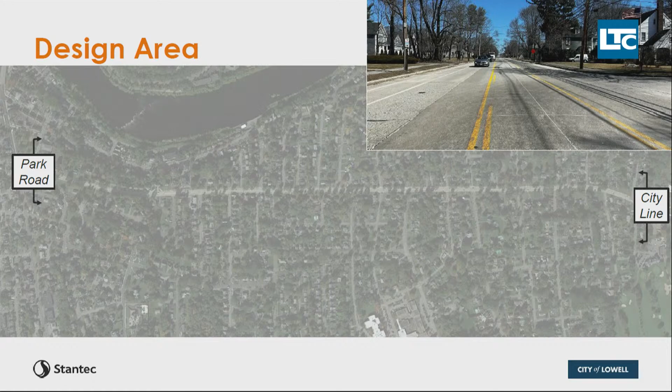We went out there early in the spring and realized that this is a road with a lot of complications, but also a lot of opportunity. As you can see on the screen, Andover Street is used by people to walk through their neighborhood and to ride the bus into Lowell. It's also the entrance to two schools, the Riley and the Sullivan School, and is frequented by buses.

When you get closer to the Tewksbury line, there have already been improvements to sidewalk and pedestrian spaces, and this can be enhanced.

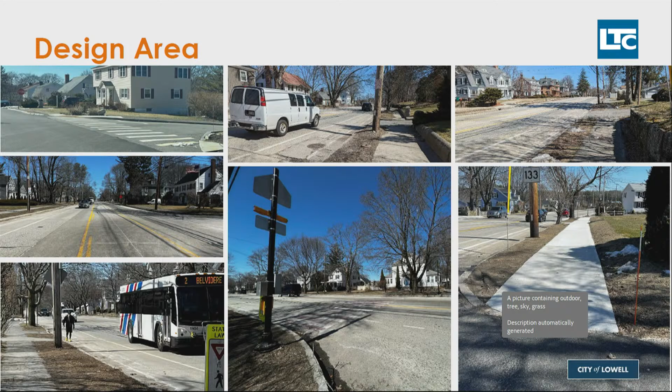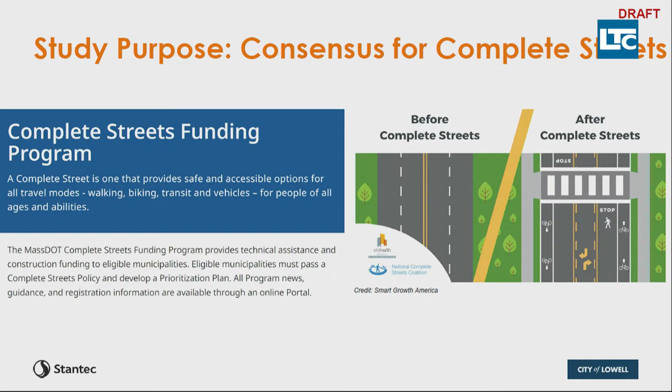A complete streets process looks at making sure a roadway is safe and welcoming for all users rather than just drivers. So the approach we took was to not just look at Andover Street as a means to move vehicles through Lowell, but to really consider what the residents needed, what the students at these schools needed, and how we can get more folks to use Andover Street in a variety of ways.

This is right in line with the City of Lowell's policies defined in the Go Lowell Multimodal Complete Streets Plan. As you can see here, the current mode choice of many folks in Lowell is to drive their vehicles, but there is an interest in using transit on the bus and using bicycles more.

I'm going to highlight bicycles for this process, as there's a 28% interest in bicycling, but only 9% actually do. So how can we use this process to bridge that gap and invite bicyclists to use Andover Street?

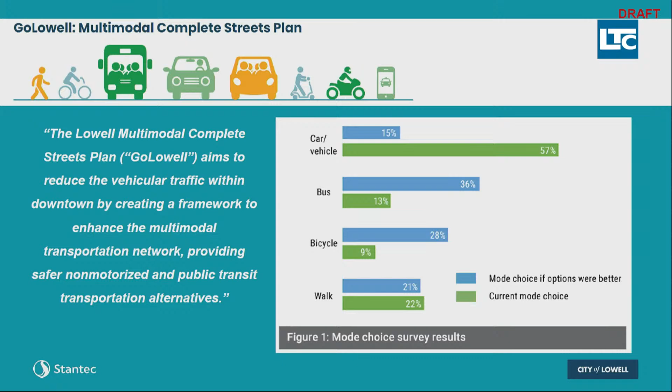The Multimodal Complete Streets Plan did identify Andover Street as an area that needs particular attention. From Nesmith Street to Clark, it was considered a high-need corridor that needed attention from a safety perspective and a complete streets approach.

It was also identified as a route for a bus pilot program between downtown and Wentworth, and then from Wentworth to River it was identified as a pedestrian priority zone. So we considered all of this in our design, making sure it was friendly to buses, but also pedestrians, as that was identified in the plan.

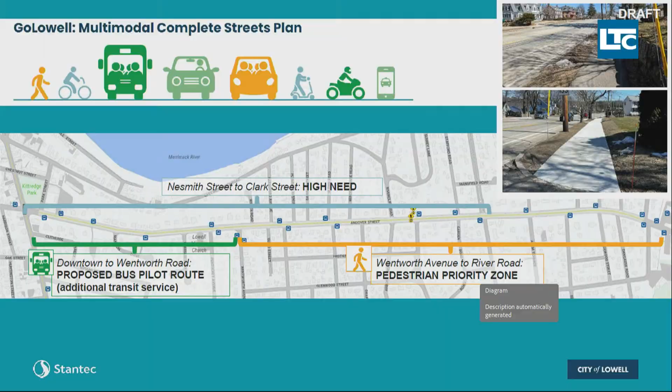When the process began, we knew that we needed to collect some data, so we went out and collected traffic counts and realized that there are about 20,000 vehicles moving on Andover Street daily, about 10,000 in either direction, spanning the course of the entire day.

We also collected speed data, and what you can see here is that along the corridor, folks are traveling at a consistent speed between 35 and 40 miles per hour. That is in line with the posted speed limit Lowell has established for Andover Street, but it's a problem now that we're talking about this street as a neighborhood and a front door to schools.

When a vehicle hits a pedestrian at 20 miles per hour, the pedestrian is much more likely to survive that incident. When a car is driving 40 miles per hour, as they are on Andover Street, there's a 77% likelihood that incident will result in a fatality.

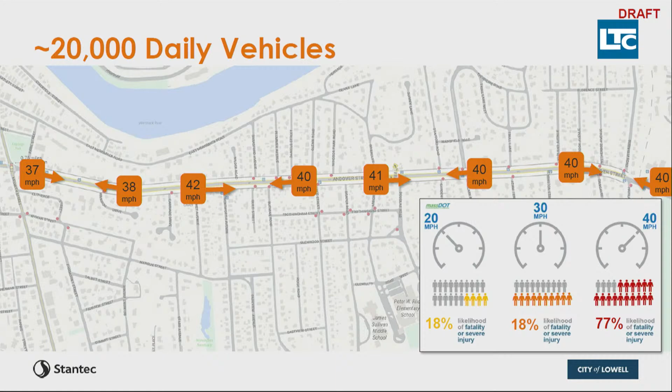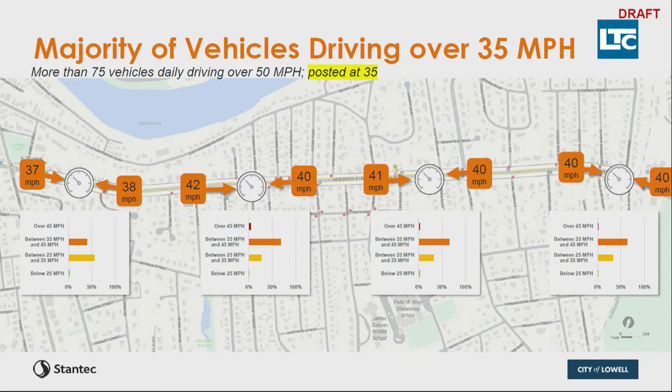What I'm showing here is that folks are traveling at these speeds, and we want to make sure that the design we create will not just allow Lowell to post the speed limit at a lower speed, but also that cars will not want to travel over it. There's a way we can design the road so that cars will drive slower and in a safer manner.

To start, we can look at the width of the road. Today, Andover Street is fairly wide. You have two travel lanes that are 12 feet and one 10-foot left turn lane that allows vehicles to go in either direction. The problem is that 12-foot lanes are typical for a highway.

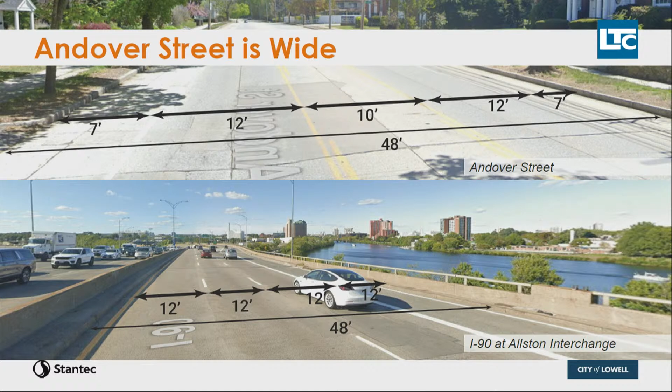What you're seeing on this slide is Andover Street's cross-section on top, and on the bottom, the I-90 interchange in Allston - so it's a highway, but we have 12-foot lanes here. Andover Street doesn't need 12-foot lanes. It needs something closer to 11 or 10-foot lanes to encourage folks to drive slower.

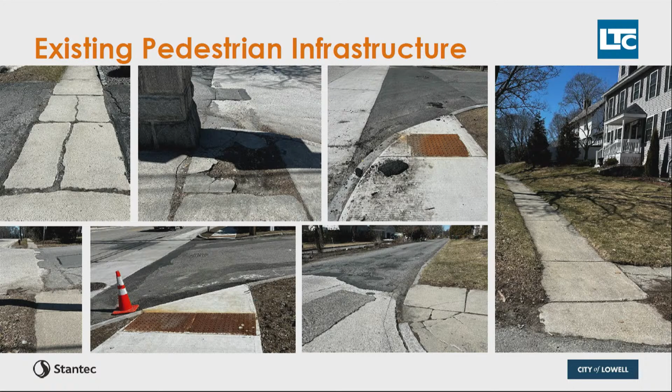We also looked at crosswalks. What you see here is the 3 crosswalks on the Andover Street corridor, at the intersection at Nesmith, Douglas Road where there's a rapid rectangular flashing beacon, and one near Holbrook Avenue that's painted but you can't really see it when you're driving down the road, and then one past the town line. When you have a stretch that's almost a mile, under Massachusetts law, a pedestrian is legally allowed to cross the street anywhere along this corridor, as it's more than 300 feet between crosswalks.

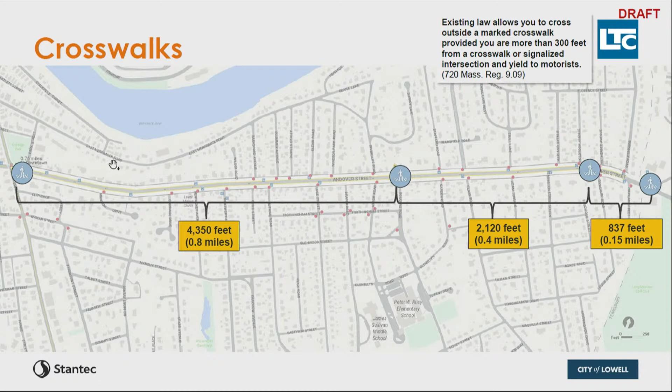If pedestrians are legally allowed to cross the street, we want to make sure they are safe in doing so. So our design is going to recommend that crosswalks are placed more frequently, somewhere closer to 200 to 500 feet along the corridor, so that you're never traveling out of your way to cross the street in a safe manner.

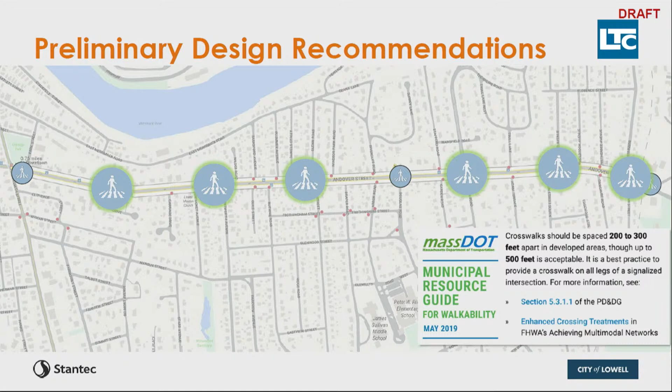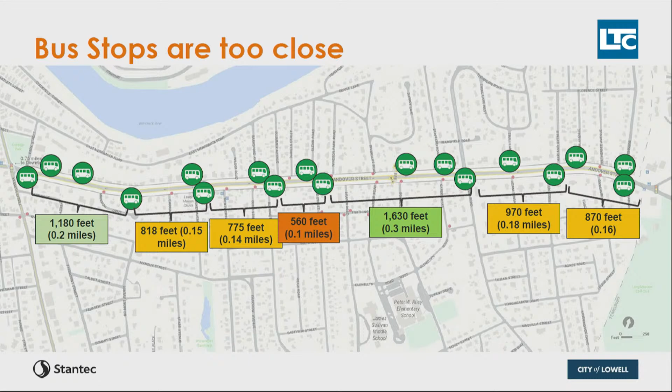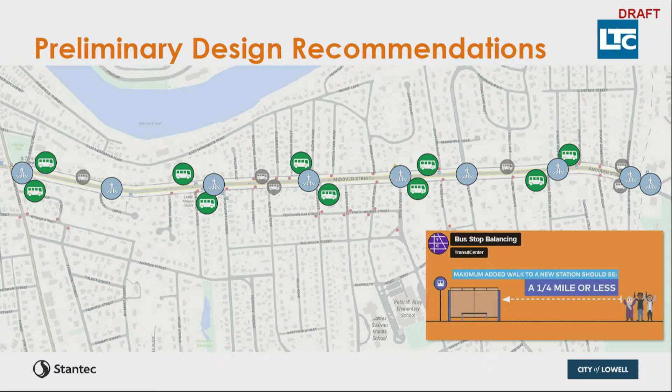We also realized that the bus stops along Andover Street seem to be placed haphazardly across the corridor. They are as close as 0.1 miles in some areas, which does not allow the bus to gain any momentum as it's traveling down the roadway, and folks can't predict where the bus stop is. Instead, we're going to use national guidance of having bus stops be about a quarter mile or so apart, allowing fewer bus stops but at more regular intervals along Andover Street.

So that's some of the existing conditions data. That's what the data has told us needs to happen.

We heard a lot that folks are driving too fast. We heard a lot that the road is noisy and that there aren't enough sidewalks. We also heard that it's important to turn left at some of these streets, as it's the way that people can get to their neighborhood. So we included all of this into our thinking as we came up with the design.

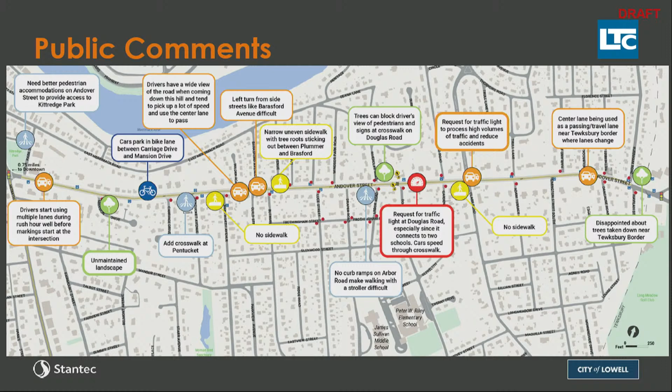Now that we understood what was wrong with Andover Street, we were able to think more about what would you like to see. As I talked about, Andover Street is quite wide, and we have the opportunity to add additional elements that will encourage a complete street.

Folks were interested in bicycle facilities such as a multi-use path or protected bicycle lanes. We also talked about adding crossing islands and wider planted boulevards to encourage the trees that are out there today to continue to thrive, and add crosswalks so that we can get closer to that standard of 200 to 500 feet.

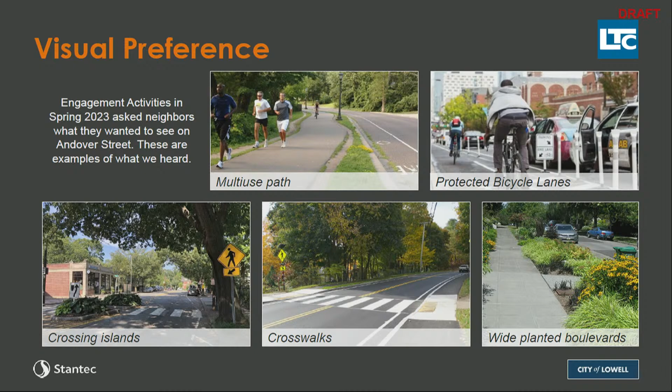Through this process, we asked the residents and the users of Andover Street what they wanted to see in the process, what goals were important to them. And we heard things like we need to improve local access to downtown.

We need to reduce cut through on the side streets. People are avoiding Andover Street today and driving through the neighborhood because it's so difficult to turn left and access the road. So through these conversations, we determined that the goals for Andover Street would be to prioritize walkability, increase connectivity, preserve character, and accommodate multimodality.

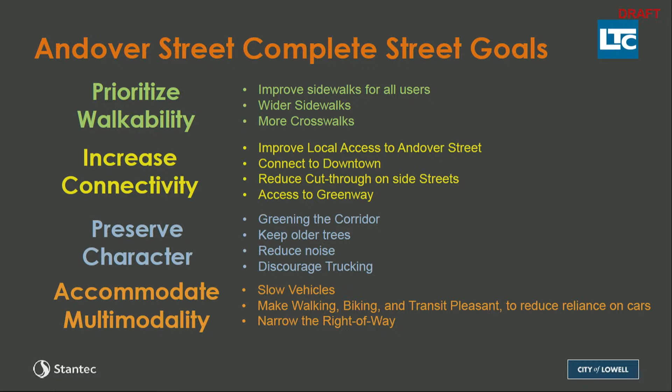And you will see all of these included in the designs that I will share shortly.

One of the big concerns with Andover Street is that it is currently a concrete roadway, so it's more difficult to make some of the adjustments that we could typically do with an asphalt roadway. And folks did request us looking into if we removed it entirely.

This is not ideal. If we were to remove the concrete on Andover Street, it would result in lane closures. We'd have severe traffic implications. The residents would experience noise and vibration, and the city itself would have high disposal costs.

And so our design is going to suggest ways that we can design Andover Street and keep the concrete through engineering means, as opposed to removal altogether.

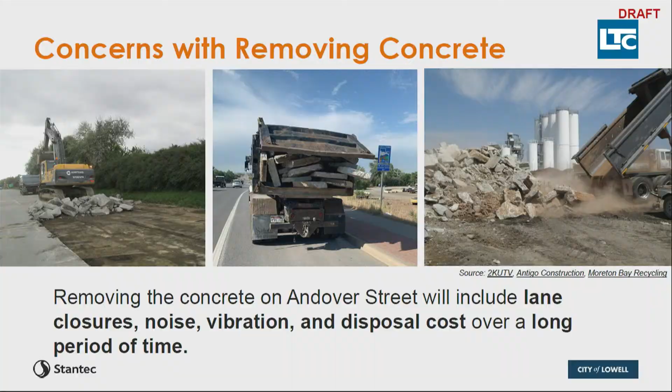We talked about how we wanted to add additional crosswalks. We want to consolidate the bus stops, and then we also want to add left turn pockets rather than the left turn lane in key areas.

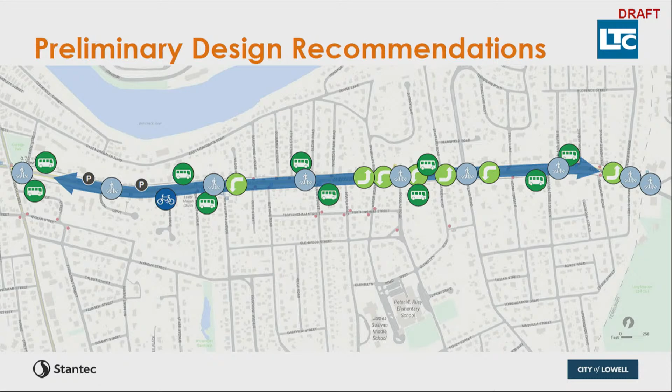So we worked with the city and we talked with the community earlier in the summer to identify where those turn pockets need to be, to ensure that folks are able to get to their houses and around the neighborhood.

I'm now going to talk about the two long-term design recommendations. So this process was charged with looking at what Andover Street could be in 10, 15 years. And so we came up with two options that will ensure that folks are still able to travel along the corridor, but also provide an amenity for cyclists and pedestrians.

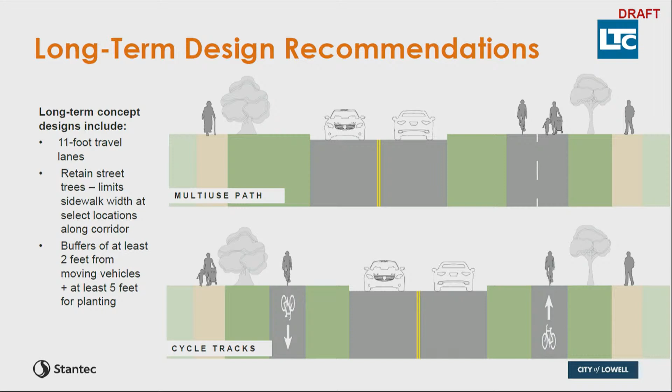So the first one is a multi-use path, where we're narrowing the roadway by adding space to the southern curb and adding in a multi-use path. And the second is when we narrow the roadway from both sides and add a cycle track in either direction.

This is just a plan view of what that multi-use path can look like. You'll see that we're adding in bump outs to ensure that cars are able to slow down as they're approaching intersections. And we do have this nice facility on the southern side of the curb for people to walk and ride their bikes and for kids to play.

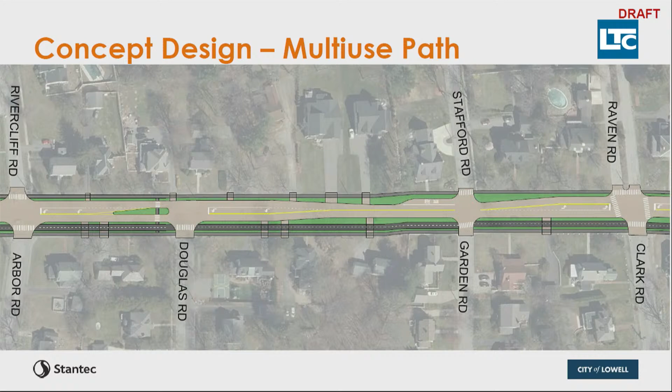One other element of this design was where we have a left turn lane on the opposite side of the intersection, we're adding in a crossing island as a countermeasure so that folks who are crossing the street will have a place to stop and continue if needed. And then, just as I showed before, we had what Andover Street looks like today.

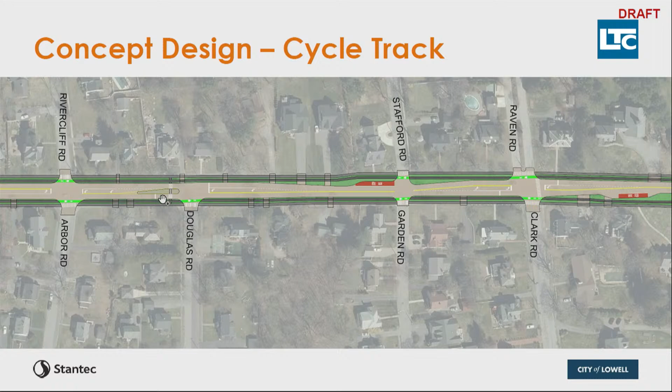The second option was if we narrowed the roadway from both sides of the street and added cycle tracks. This would be a bicycle facility in both directions, raised up to sidewalk level. Most other elements are similar to the multi-use path, but we do have bus stops and advanced yield markings indicated in both plans. This is what Andover Street could look like with cycle tracks.

These are two long-term concepts of what Andover Street could be, but aware that this will take a long time and there's interest in changing Andover Street sooner, we also looked at what we could do with paint in the next few years to ensure Andover Street can evolve into this long-term concept.

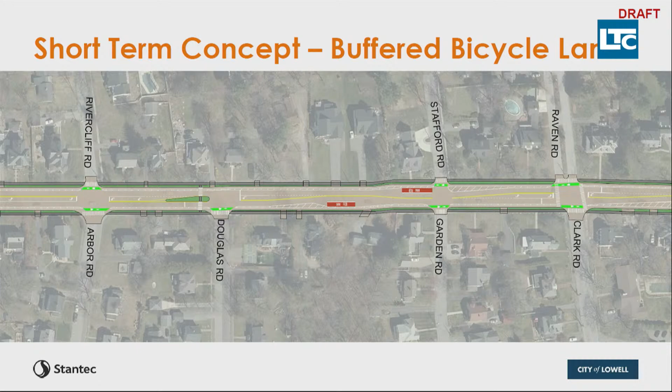So what we're suggesting here is the same cycle track plan you saw a few slides ago, but instead of doing this with curb work, we're able to do it with paint by adding in the bicycle facilities and moving the center line of the road. Here's a quick rendering of what that might look like.

The one thing we want to consider with an on-street painted option is how we can keep bicyclists safe, how we can ensure this is a snow-proof design, and make sure it's something that could last until the long-term plan could work, so folks aren't just driving around the cars traveling in this lane because they can today.

So there are a few options out there, including adding in barrels or what we call armadillos, which are small barriers that will go on the ground. We can also add plantings for the summer months.

One thing we talked about with the engineering team is that bollards and flex posts are not preferred. You may have seen them in downtown Boston. They won't give the same character that the neighbors are looking for, and it'll be a lot of flex posts down the entire corridor. But these other options are definitely approaches that could be used.

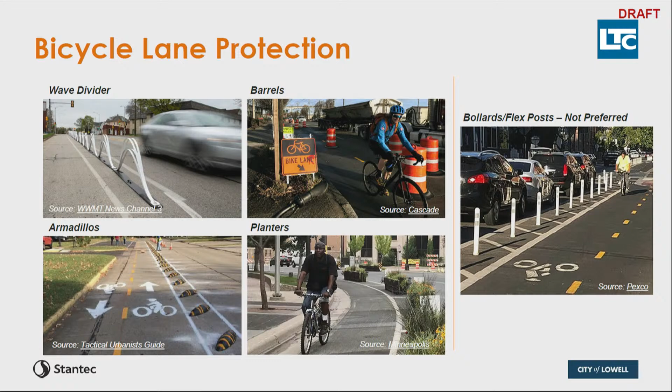The last part of our scope was to look at how this could be implemented. So we took a look at all the funding opportunities available to Lowell and how they may be applicable. There's a separate memorandum we can share with the committee that talks about the opportunities and how Lowell can go about approaching these applications. But we want to make sure the designs we created are implementable and could get on the TIP as soon as the next couple of years.

So with that, I'm going to turn it back over to Liz. And if you have any questions, please let us know.

So I think this is where we are. We have two concepts presented and potential short-term implementation. I personally don't think I would recommend installing the short-term option unless we were committed to the long-term. So this is something we will present also.

I'm attending the Belvidere neighborhood meeting in a couple weeks, just to make sure I hear all their comments. They've received this.

So from here, we need to find a way forward. If this is something we're getting a lot of positive feedback for, that the community and the council feel is a worthwhile investment in the future of Andover Street, we would need funding for design if we want to get on the TIP program, which we haven't really done an estimate on, how much something like this would cost.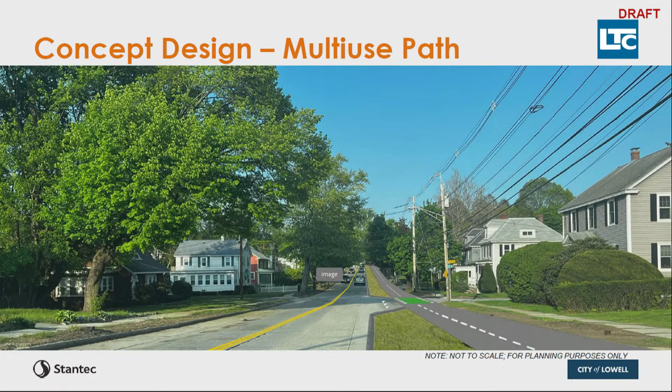So that's my pitch. Awesome, great. Thank you. Also joined by our Assistant City Manager and DPD Director, Yovani Baez-Rose. Looks great to me, but as you know, I recently found out last week my opinion doesn't really mean much with Belvedere issues. So I think I'll pass it off to Councilor Mercier for her opinion, and Councilor Nuon to see what they think about it. And with that, Councilor Mercier.

Thank you, Mr. Chairman. I'm glad they did away with the thought of having bollards all over the place, I didn't like that approach. The one I'm looking at now is very nice. I know people thought there'd be a median strip with trees and flowers, but I think that would be a little too much because you have to maintain it even more, and trees grow, and would it prohibit the view for turning onto certain streets? But that looks pretty good.

I'm glad we're addressing this, this is an entrance into the city. Is this a city road or a state road? This is our road. Our road, okay, so that clears that. But I think it looks very nice. You're including everybody, bicyclists, walkers.

I know there's a lot of sidewalk areas along Andover Street that need to be repaired. I just reported one some time ago. The homeowner that lived there never complained to me, I just happened to see it, and I said, holy Moses, and it was fixed, so that's a good thing. And I didn't make a motion either, that's a good thing too.